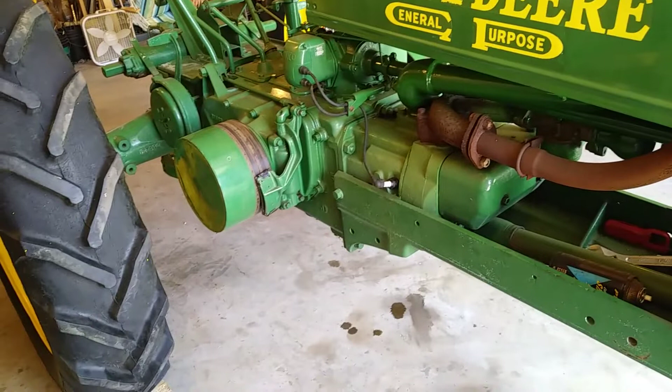And let me just go ahead and say two things right off the bat here. One, the camera's gonna shake, my hands shake like a leaf. I'm sorry, I can't help it. Second thing is, I am no mechanic, I am no expert at this stuff. I'm just making videos to try to help the next guy. So you can take this information with a grain of salt. This is what I'm going through. It may help you.

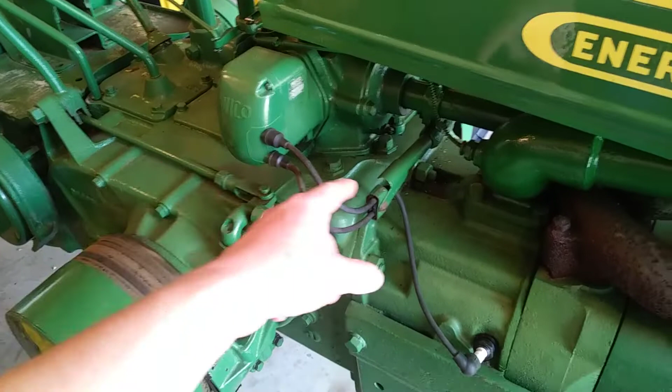There are a lot more experienced guys out there, but a lot of them aren't making YouTube videos, with the exception of, I just did watch a video from Zeke the Antique Freak, who was showing how to time the Magneto with a tractor. But I'm having a whole lot of trouble figuring out the settings on the back side of the Magneto, the lag angle. So I pulled out my book. I just about forgot I had this book. This is the back side of the mag, and it tells you right here how to set that lag angle.

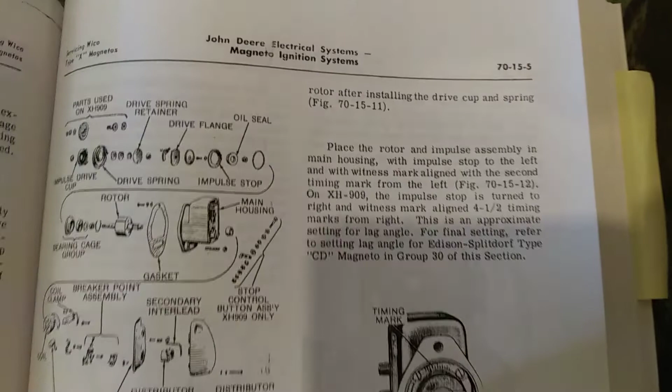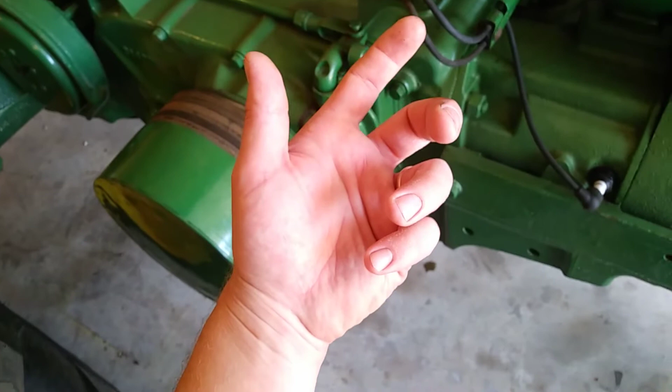Now, I was jacking around with this tractor a couple of months ago because I saw a strip of paint here where somebody had rotated the mag since it had been painted, so I thought it was just out of whack a little bit. Then I realized that they had pinched this temperature line behind a bolt there. So I thought, well, hell, I'll take that bolt out. While I took that bolt, I took the bottom one out. So I'm looking at the back of it, and this ain't turned the way that I think I saw in a video. So I started jacking with it. I should not have done that, I didn't know what the hell I was doing. So I'm sure I've got this Magneto now out of whack on the back side of it.

So anyhow, I may or may not have the mag timed to the tractor right, but I'm almost certain that the lag angle, the marks on the back of the mag, are wrong. From what I've learned watching other videos and reading the book, this top one should go to the left-hand side cylinder. The bottom one should go to the right-hand side cylinder. Watch Zeke the Antique Freak's video on setting your Magneto to your tractor. He's going to do it a whole lot better than I am, so I'm not going to show you that.

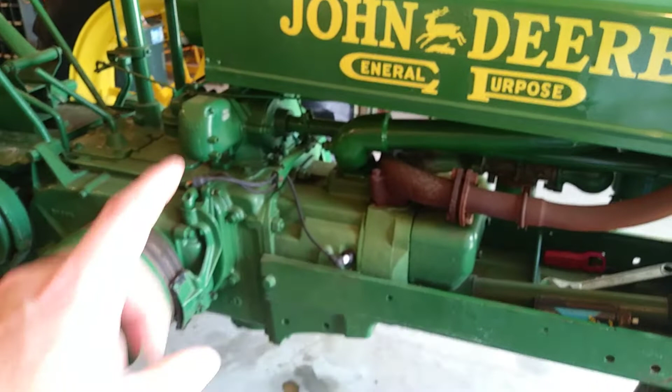What I am going to do is disconnect my wires, pull out this bolt up here and the bolt down here, pull the mag off, and show you what it looks like on the back. Oh, and one other thing, I can't get this tractor to run at all now. It ran like crap before. It sat here for a couple of months. I've done some work on the tank and jacked around with that Magneto while I had the tank off, put everything back together, and I can't get it to run at all now. So I know I have screwed myself up with this Magneto. I'm going to take that mag off and show you the mistake I probably made, and hopefully you won't do the same thing.

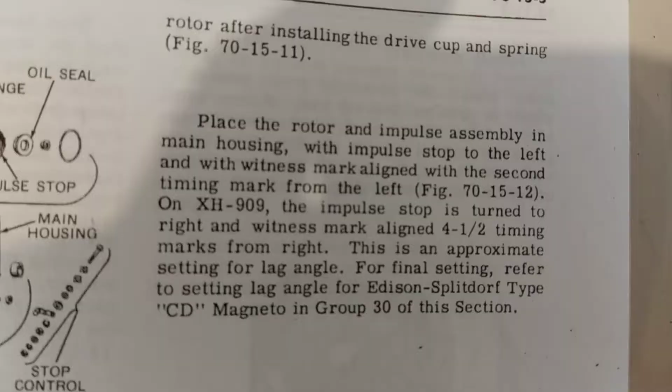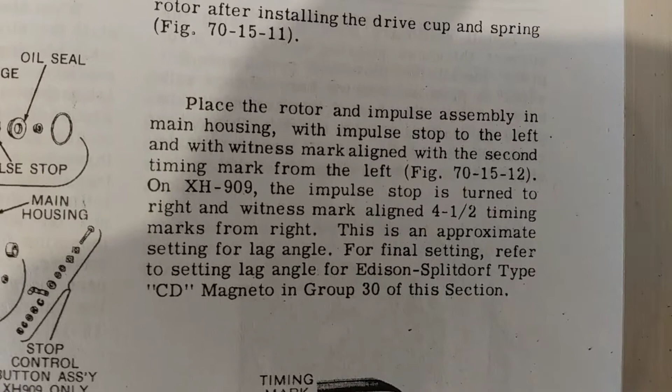All right, so I got good news and I got bad news. The good news is I got the mag off, and I got a book that tells me how to set the timing on the back of the mag. So blah blah blah, witness mark aligned with the second timing mark from the left, like that. Well, here's the bad news.

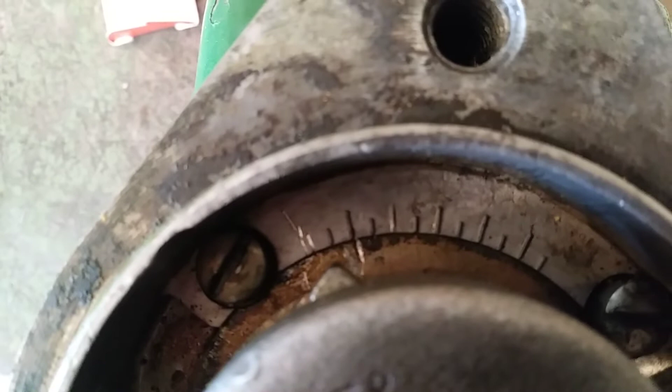There's the witness mark, and I've got it just about dead nuts with the second timing mark from the left. Now you see that scratch in there, where my big old fat finger is? That scratch is where the witness mark was set when I got the tractor. So, now that I know what I know, I'm going to set it, again, according to how Zeke the Antique Freak set his. Look at his video.

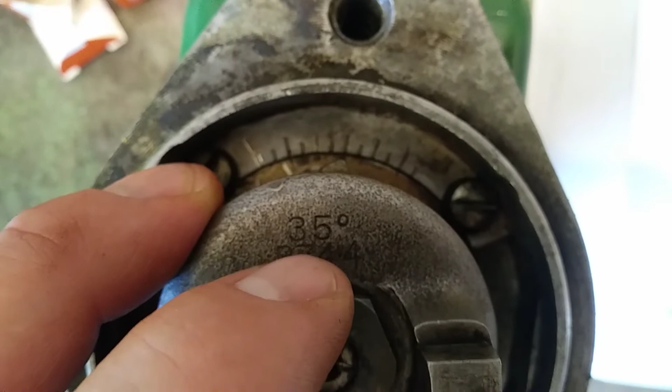I'm wondering if I got my mag flipped 180 degrees. Anyhow, watch Zeke the Antique Freak video on how to do the reinstallation of this mag. So I feel pretty good about the witness mark being set to the right angle or whatever. I know this means something. This 35 degrees. I'm hoping that 35 degrees is that second mark there.

But this is the book. You know, this is the John Deere. This is a copy of the original manual, and this applies to every mag except if they make an exception in the description, which here, this tells you how to do everything unless you've got an XH909. Well, I don't have an XH909. I've got an XH477, 4771, 477 something. So anyhow, it ain't no 909, so this should be what I do. So that's what I got here.

So now, go over to Zeke the Antique Freak, check out his video, and then come back to this if you want, and we'll see what happens with my tractor.

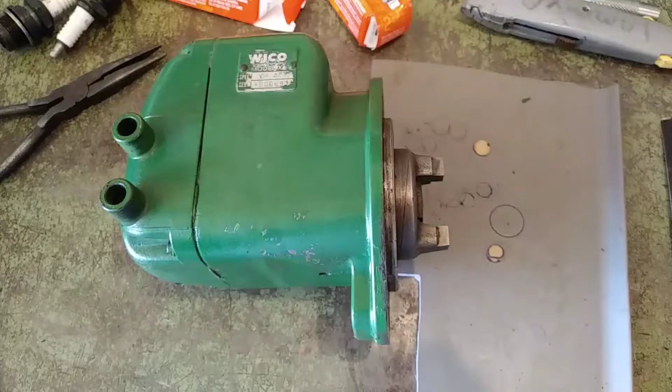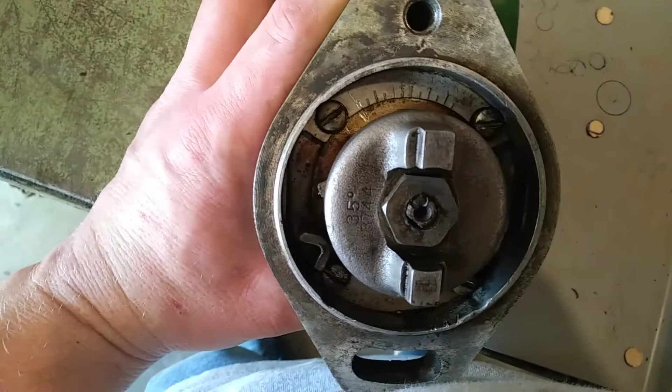Alright guys, so we got the mag back on the damn bench again. It's a little frustrating. It's probably hard to hear me. I got the fan going because it's hot. I took the damn thing back off again because I can't get it to do nothing still, and I'm moving these marks back to where somebody has scratched a couple of marks in it. They did it up there and they also did it down there. You see them shiny marks? I'm putting it back on them scratch marks. I don't know if somebody's done something goofy with this mag or what, but I'm gonna put it back on them scratch marks, stick it back in the tractor, and see what the hell happens here.

Alright guys, so that last little clip was from 2 days ago, and I'd had enough. I couldn't figure it out. I tried it with the mag lined back up with them scratch marks. I was getting spark out of both spark plugs. I know I had the timing right. I'm getting plenty of fuel. Only thing I could think is that spark was just so weak that it wasn't enough. So I kind of gave up on it.

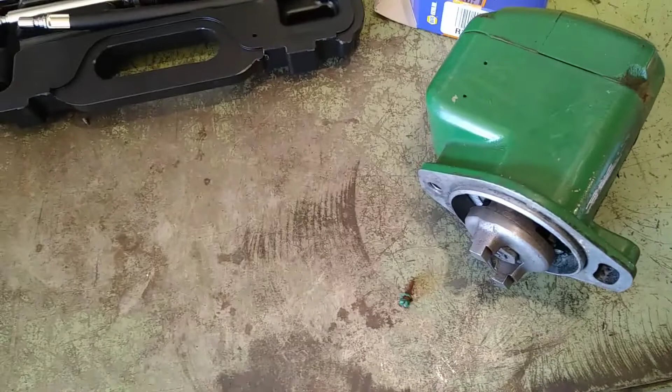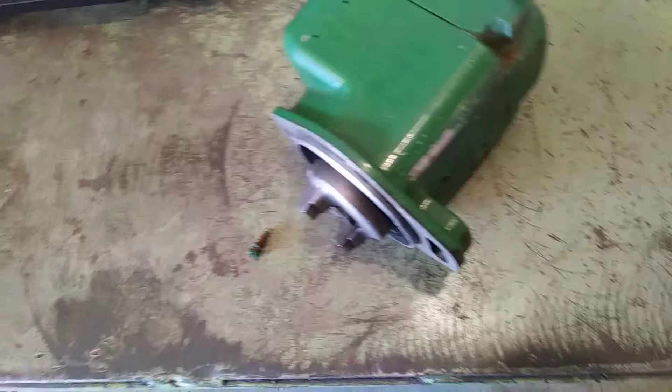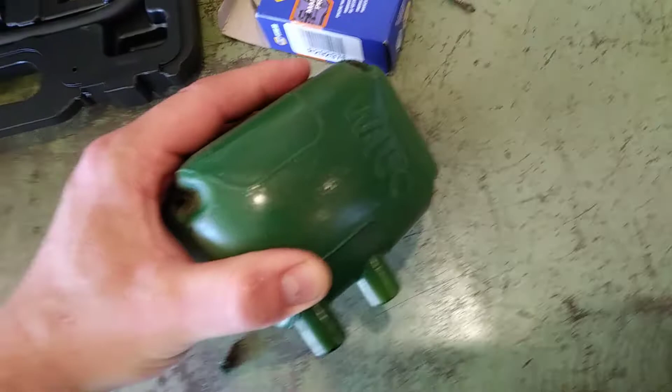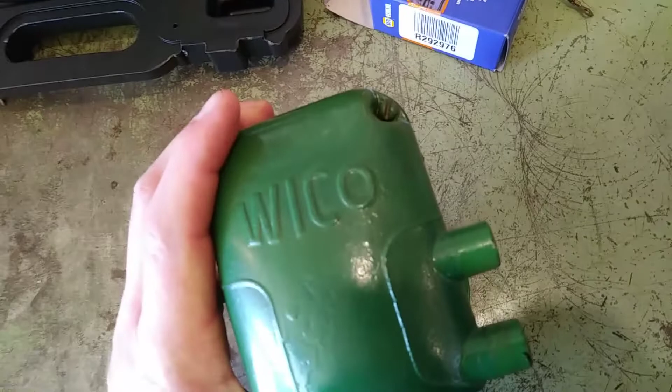I was getting pretty frustrated, and as luck would have it, I found a fella down the road, not too far from my house here. He does a lot of work on hit and miss engines and old tractors and stuff, and he helped me out considerably. I went over, first time I'd met him. He's super friendly, super helpful, and we went through this mag a little bit, and the first time I talked to him, he said the condenser's probably bad. He said the condenser's bad, we'll work on it, come back tomorrow. So I went out and got a condenser for it and brought it over there to him today.

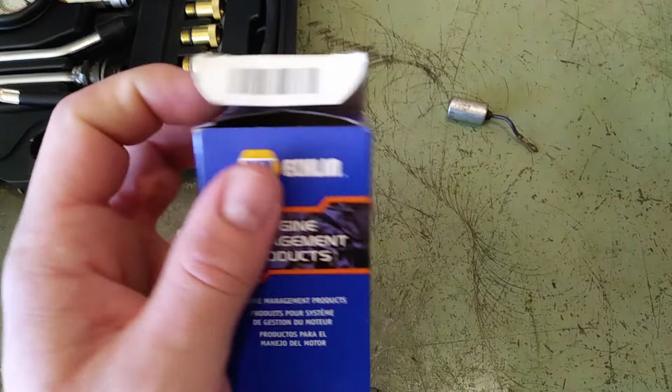This is a Napa condenser that I bought. All these Wico mags cross back to this. It's a WI200. That's the Napa number. That's an Echlin Napa number. It looks like a 1, but it's an I. It's WI200. This is the old condenser that came out of it.

His name is Bob. Bob looked at those points. We took the cap off here. He looked at the points and he said, yep, the condenser's bad. Just by looking at the points. He said all that white oxidation around them points, that's an indicator that the condenser is bad. So we replaced the condenser and cleaned up. It's pretty nasty in there. This thing is kind of a mess.

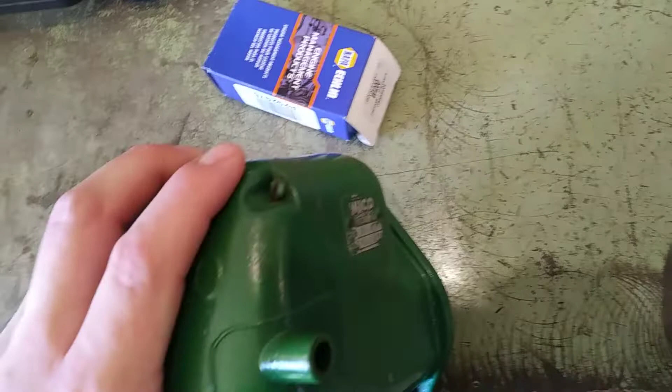The cap is busted here on the bottom. I've ordered a new cap, but that was letting moisture and nasty dirt and everything in there. One of these cap bolts was broke off, so Bob drilled it and retapped it. So now all 4 bolt holes are good. I'm going to get a new cap. I've actually already ordered that. That's on its way. We cleaned up the points real well.

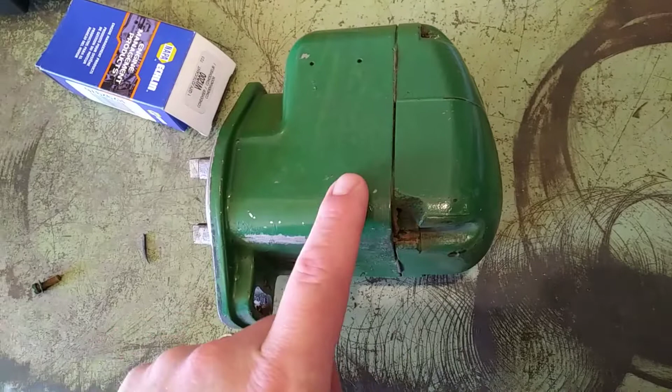We took them out. He checked the coil, said the coil looked good. The magnet, he had like a feel for it. He rolled it over. He said the magnet felt strong enough. We took out the points, cleaned those up. We cleaned up the inside of the cap, the contacts in here. They're pretty worn out. The 2 copper contacts for the plug connections are pretty worn in there. So a new cap I think is going to help considerably.

But after we put in that new condenser, he cleaned it up good with brake parts cleaner, blew it out and dried it out real good. Cleaned everything, put it all back together, and man, I'm telling you, it threw a hot spark. So I'm real hopeful that now this will fix the problem.

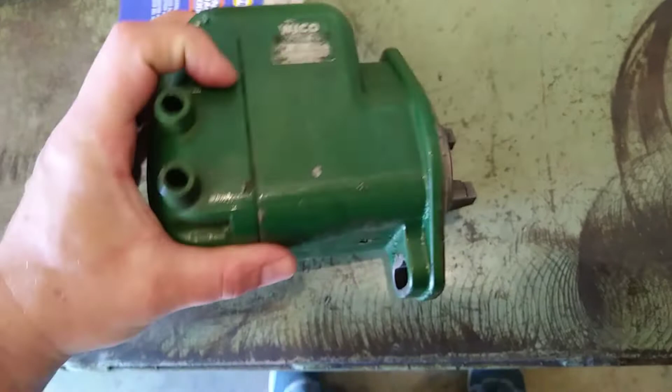I still do have it lined up, and I talked to him about those marks. He said there's a good chance that somebody just marked it before they took it apart, and that's probably where it was running. So I think that's where I'm going to leave it right now. It's not timed like the book says, but somebody had it that way. So I'm going to leave it like that for now and see if it'll run like that.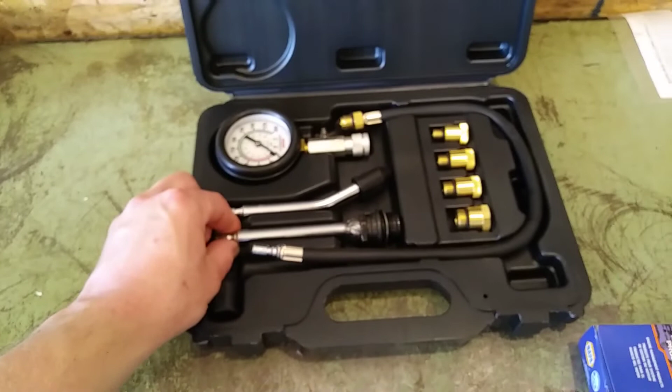On Friday, today's Sunday, that last clip I made, I was getting pretty frustrated. I'd kind of given up on the mag, and I was looking for something else to do before I started throwing shit and breaking stuff. I got my old Harbor Freight compression test kit out here. I just picked this up a few months ago. It was a tool that I don't have in the shop, so I figured, what the heck, I don't need one very often, but sometimes I do, and I don't know how well to trust it.

I saw some terrible reviews about it, but for like 20 bucks, you can't touch any other compression tester for this price. So I figure even if the compression reading is not as accurate as the others, hopefully it's consistent. If it's consistently inaccurate, I'm okay with that, because I'm not so much concerned with the pressure on the 2 cylinders. I'm concerned about the difference in pressure. So if that gauge is off 5 pounds, that's okay, as long as it's off by the same 5 pounds on this one. I want to see if the compression is the same between the 2 cylinders.

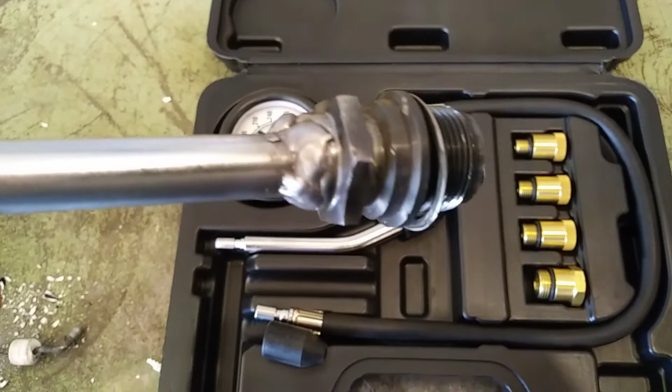These kits don't come with a big enough adapter for the big John Deeres. I think that one worked for my H, but the A and the B, it wouldn't. So what I did was I sacrificed one; it comes with 2 of these things with just a rubber tip on it, one's straight and one's angled. I pulled the rubber tip off of that. I gutted a spark plug, which is kind of interesting to do. Never gutted a spark plug before. So I gutted a spark plug and I welded that on there. It ain't pretty, but it's good and sealed up, and it works. So I can thread this in the plug hole, attach my tester, and I did that.

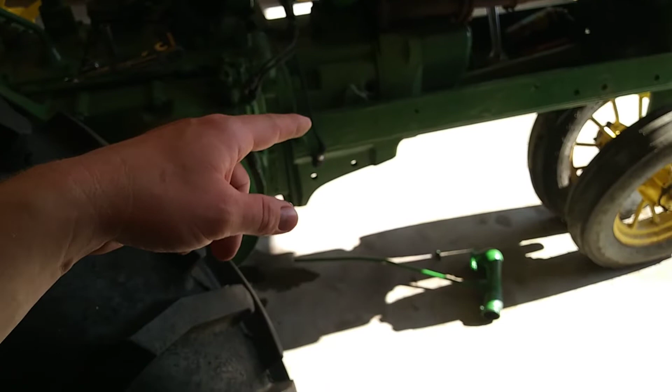The pressures I'm supposed to get, I think this thing calls for 70 psi on each cylinder, and that test is supposed to be done after the engine's warmed up. I can't get it to run, so I don't know that I'm doing the exact correct procedure here, so maybe my readings would not read 70 even if the cylinders were good, but what I'm getting is 55, and I'm getting 55 on both sides. So I feel good about the compression there.

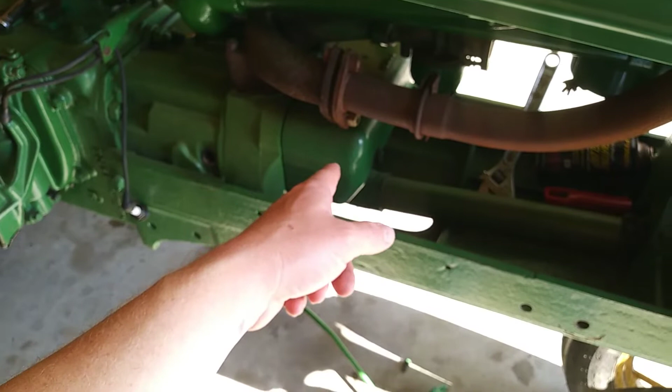So I don't think I got a major ring issue or anything, but Bob told me the very next thing you need to do is check your valve clearances. So I'm going to be pulling that valve cover off, and I'm going to check my valve clearances. I'll probably make a separate video altogether about that, but I want to see if I can get this mag in here and get it to run. So I'm gonna tinker with this mag a little bit.

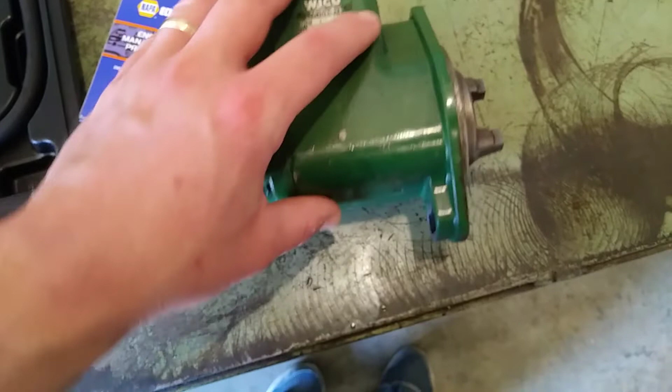I think before I even put it in, I'm gonna go ahead and knock off this green paint and get it back down to the aluminum color. And I got a new cap coming, which is gonna be solid black. So I'm gonna knock this paint off before I stick it back in the tractor. So I'll catch you guys up after I get it back in, and hopefully we'll get it running.

Can't get no more rotation out of the mag. It's backfiring real bad. I take it back this way, it gets worse. Woo! That was a big one.

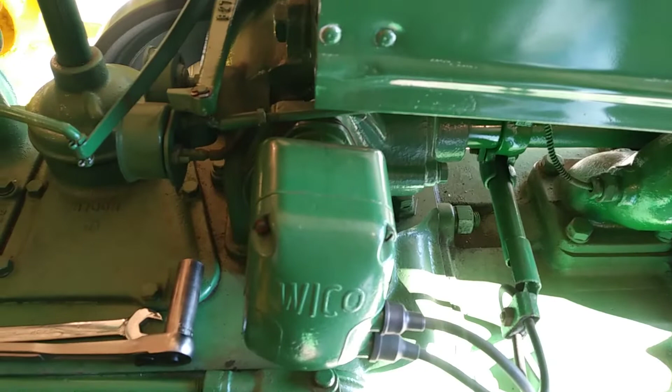Well, you saw it running there. I couldn't help myself, I put that mag on, and I could get it to start, which is an improvement, but man, it was coughing and puking and popping, running like shit. I was rotating the mag trying to get it to sound decent, and it just wasn't happening. I'd go all the way forward and it would run and stay running. I'd go all the way backward and it almost would die. It was just backfiring that bad.

So anyhow, I'm taking a break from it. That was a couple days ago. I ordered some parts, so I'm waiting on those to come in, and I'm going to get back on this thing. But I started doing some research, and I know you're not supposed to use modern plug wires and stuff. I'm just going to start at square one, go back to basics, and make sure everything is put together right.

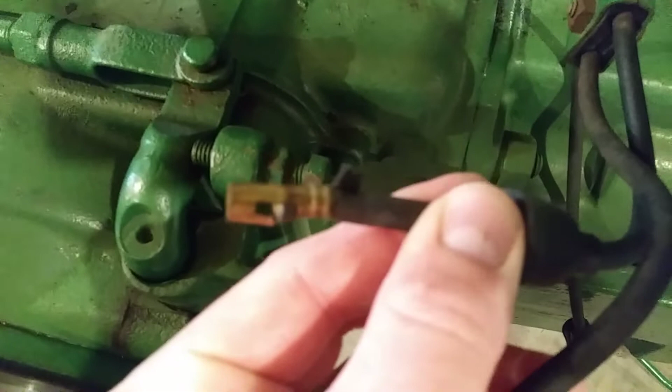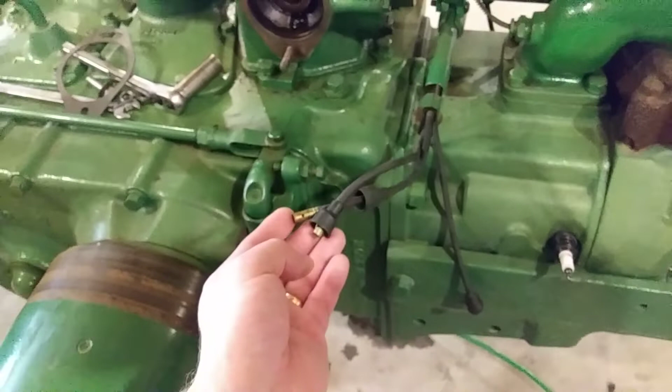These wires are using this black carbon stuff, this is a modern automotive plug wire I guess. So I've ordered a set of copper, old school copper wires. I'm waiting on those to come in.

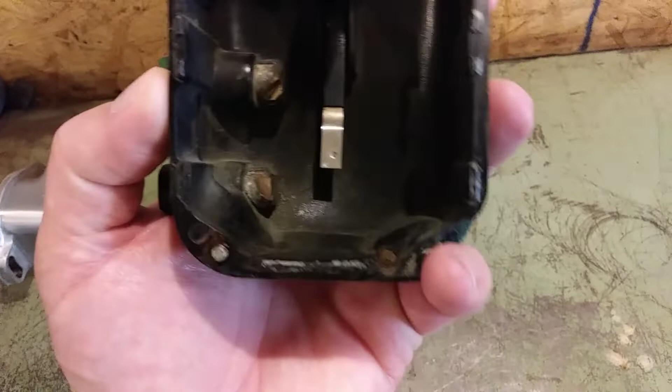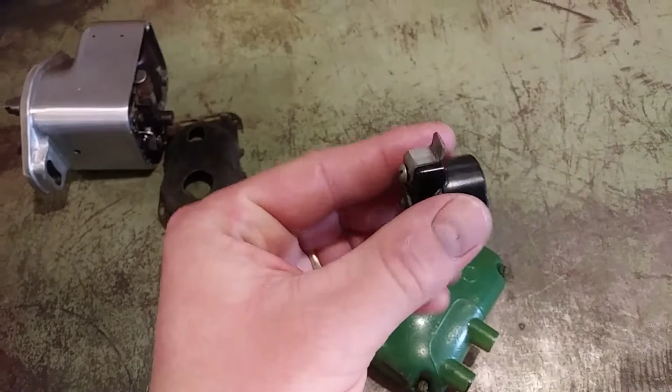I also ordered a cap, and you can see what I was talking about with that cap - it's got the busted corner out down here, those contacts in there. I cleaned them up as best they can be cleaned, the working surfaces there, but I'm afraid maybe there's an issue with the contacts. And the rotor looks good, I cleaned it up, but I'm going to go ahead, I've ordered another one too.

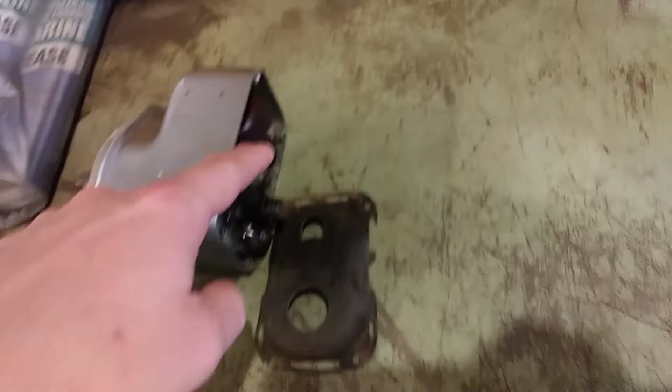So I knocked the paint off the housing on the mag, sprayed some clear on that, so it looks good. If I take a screwdriver and ground it on the housing there, and go to the contact on the coil and rotate that mag, it throws a hot spark out of the coil. Now at the spark plugs, it's still throwing a weak spark.

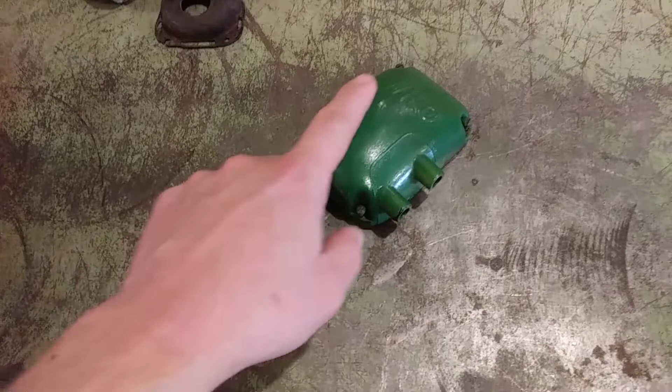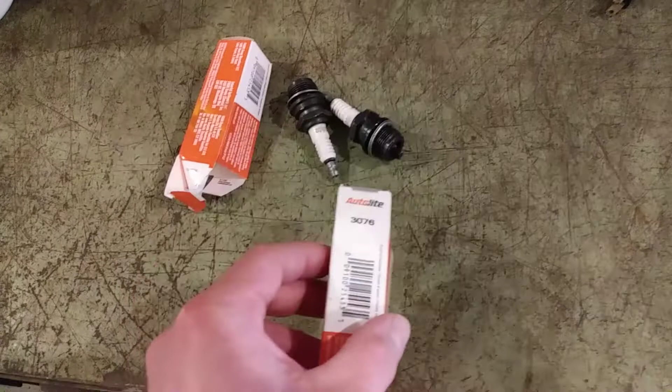So I'm hoping that a new rotor, cap, plug wires, and I'm going to stick a brand new set of plugs in it - again, I've been sticking plugs in this thing. I'm using these 3076 Autolites. They don't make the 3077 anymore, so if you guys got any of them 3077s, hang on to them because they're like gold now. The 3077 would be a little bit hotter plug, but the 3076 is what I'm using there.

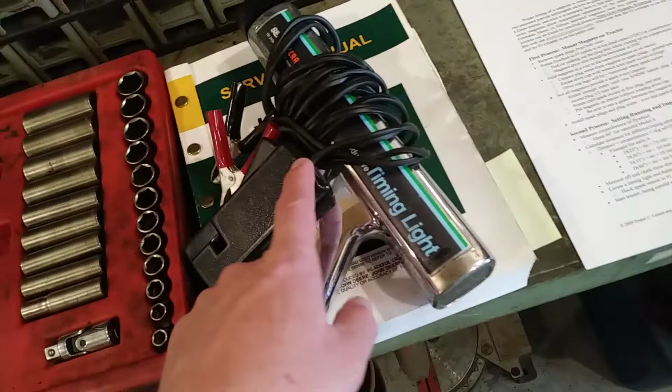I've also been doing a little research. I borrowed my brother-in-law's timing gun. This is going to be all new to me, trying to time this John Deere tractor using these instructions I found right here. This fella, Duane Larson - some of you guys into this may have heard of him, some of you other newbies like me, check him out.

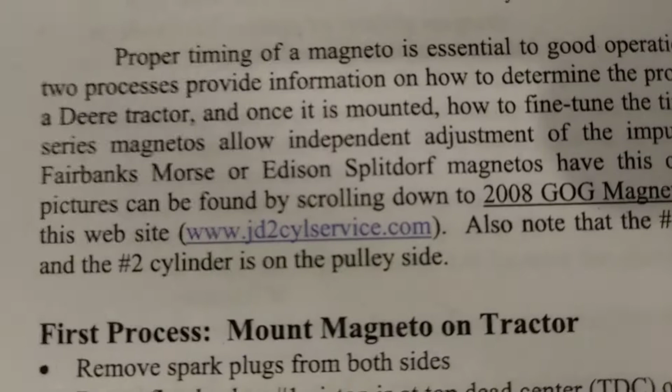Just Google Duane Larson John Deere, and there is a wealth of knowledge out there, specifically at his website, jd2cylservice.com. Duane apparently was a very smart man, did a lot of research and work on these John Deeres. It must have been his passion, and unfortunately we've lost him.

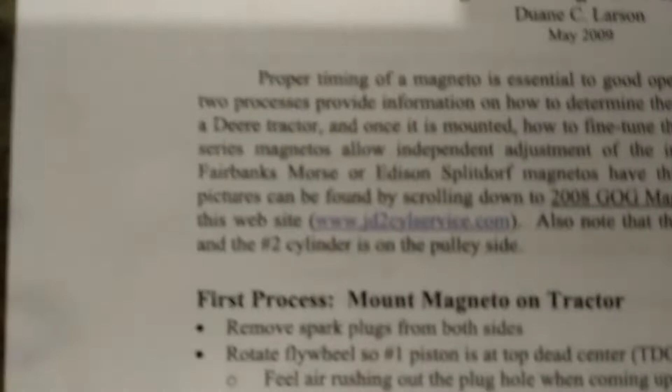That was I'm sure a huge loss for the John Deere community, but thankfully his wife is maintaining the website with a lot of the information on it still. So I've printed out directions for timing the John Deere 2-cylinder, and I've been looking at some of his old PowerPoint presentations that he was giving at the Gathering of the Green, and this is part of timing, and about magneto and stuff.

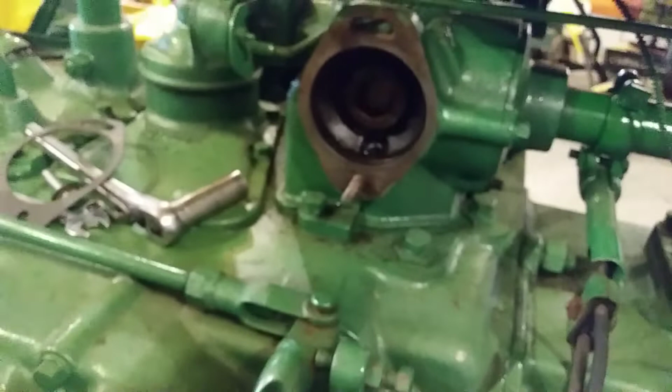So this is going to be the end of this video. This is kind of what not to do. So hopefully this video is helping you - if you're struggling with your John Deere like I am, and I'm helping you, that's the whole idea here. That's why I'm putting this video together.